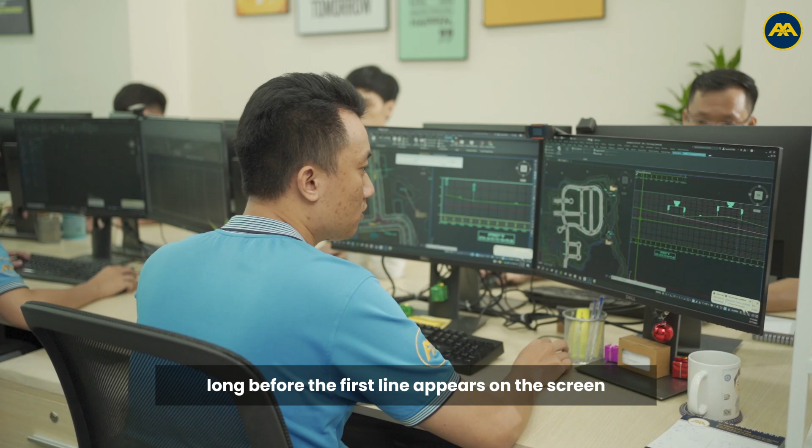A thoughtful design begins long before the first line appears on the screen. It starts with observation, with engineers studying the land, understanding its natural contours, soil conditions, drainage paths, and surrounding developments. Every site tells a story, and only through deliberate analysis can that story be translated into a design that fits harmoniously with its environment.

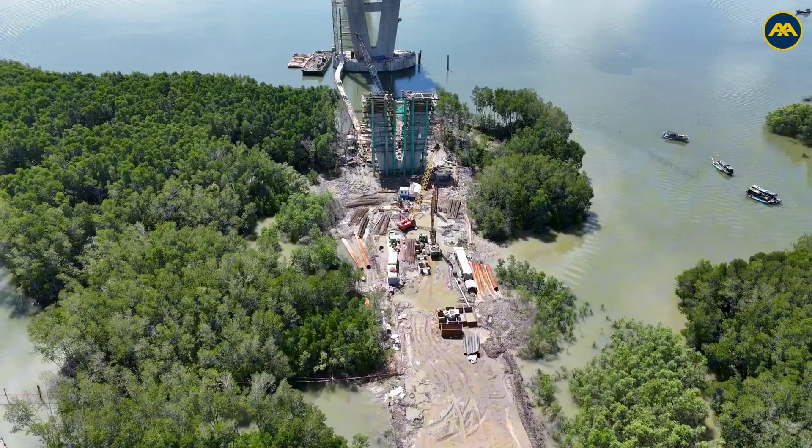When an engineer takes the time to explore how water will flow across the terrain, how grading will interact with existing elevations, or how small changes in slope can influence long-term maintenance, the outcome is more than a functional plan. It is a solution that stands the test of time.

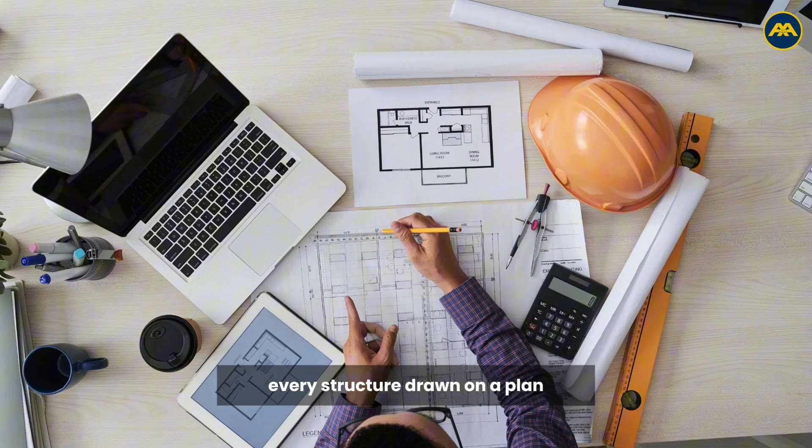Thoughtful design is, above all, a reflection of responsibility. Every alignment, every pipe, every structure drawn on a plan represents a decision that will shape how people live, move, and interact with their surroundings.

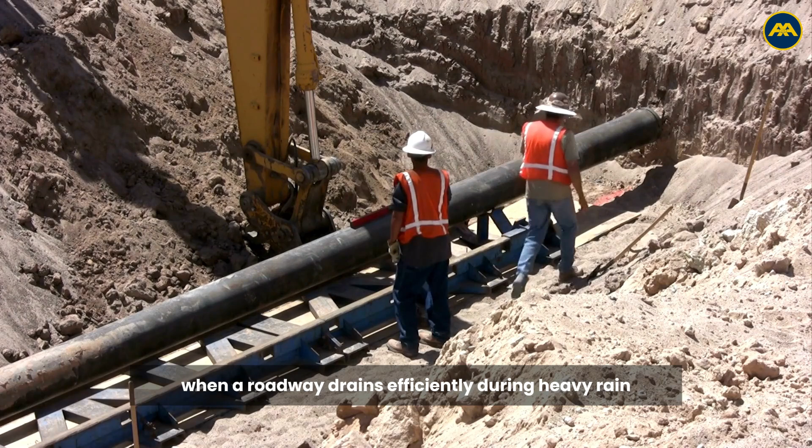When a roadway drains efficiently during heavy rain, or when a subdivision integrates naturally with its landscape, that success can be traced back to thoughtful planning and rigorous engineering judgment. The process requires not only technical accuracy, but also empathy, the ability to anticipate future users' needs and to design systems that are safe, resilient, and sustainable.

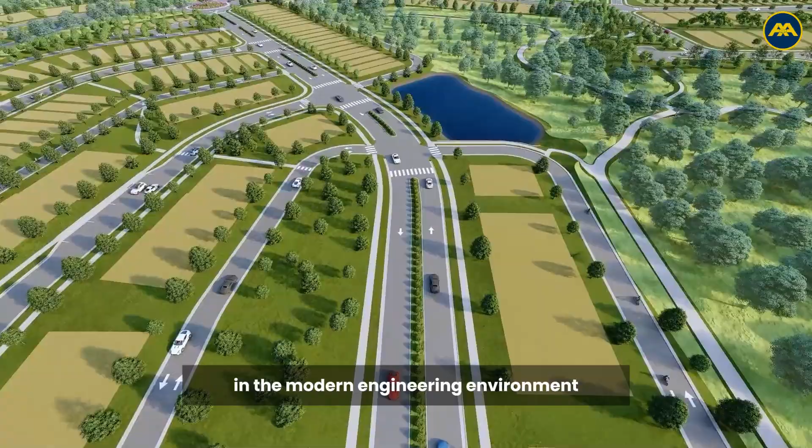In the modern engineering environment, where deadlines are tight and projects increasingly complex, maintaining this level of thoughtfulness requires strong systems and disciplined workflows. Consistent design standards, clear quality control procedures, and effective collaboration between design teams ensure that every drawing reflects both precision and intent.

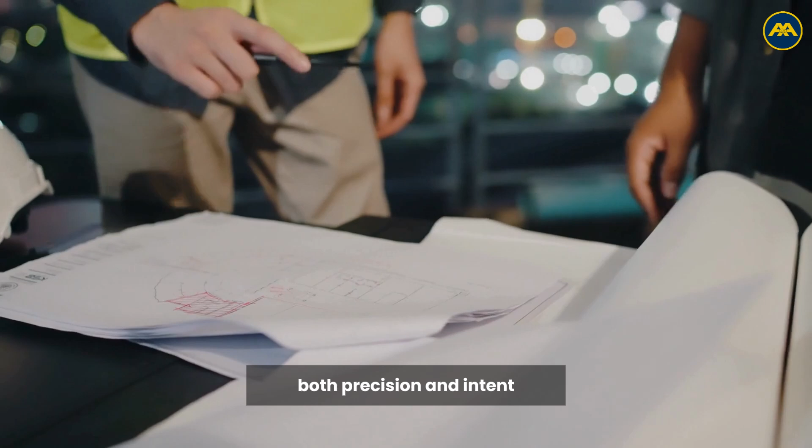These systems transform thoughtful design from an individual effort into a repeatable, scalable process that maintains quality even as project demands grow. Many civil engineering firms recognize that achieving this balance often depends on having the right technical support.

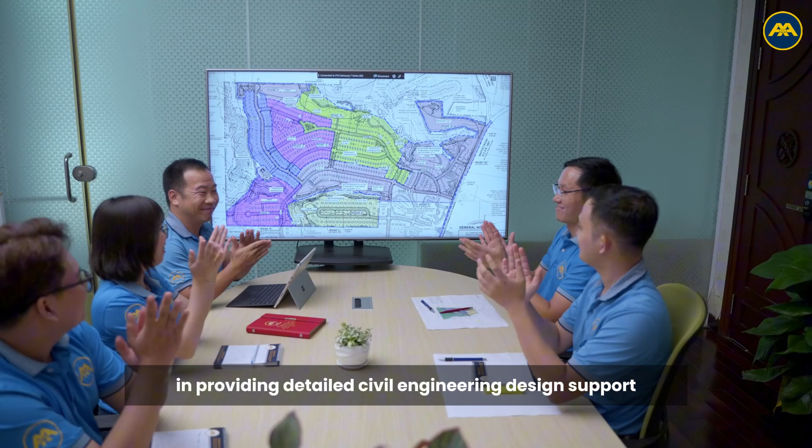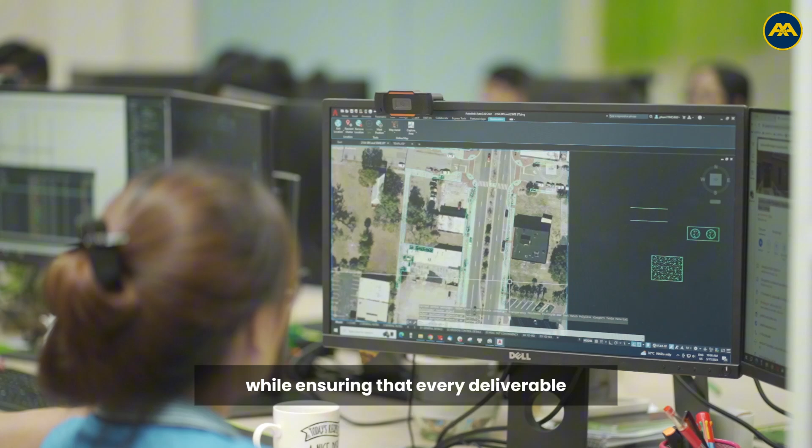Reliable outsourcing partners can play a crucial role in maintaining design consistency and efficiency. Among such partners, AXA Engineers has become known for its expertise in providing detailed civil engineering design support. Through well-structured workflows and a deep understanding of design logic, AXA Engineers assists firms in handling technical production with clarity and reliability. This allows design teams to devote more focus to creative problem-solving and strategic planning, while ensuring that every deliverable meets the highest standards of accuracy and constructability.

The approach practiced by AXA Engineers reflects the same values that define thoughtful civil engineering: precision, foresight, and accountability. Every project supported underlines the importance of integrating technical excellence with a clear design philosophy, one that prioritizes performance, sustainability, and long-term functionality over mere speed.

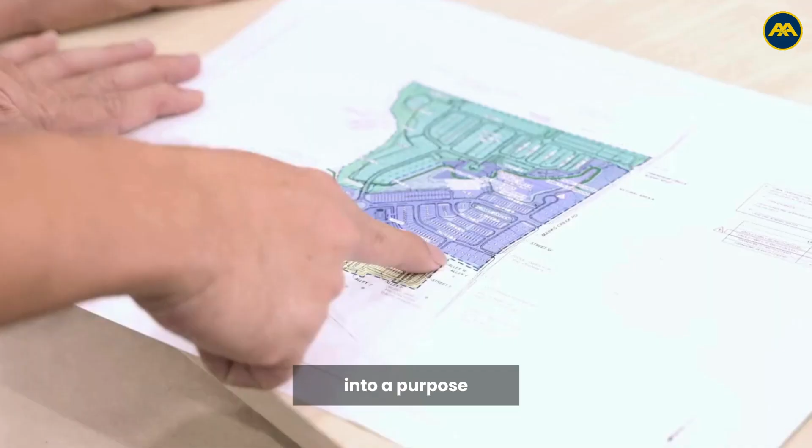Ultimately, thoughtful design is what turns engineering from a process into a purpose. It is what transforms a set of plans into something meaningful: infrastructure that works not only on paper, but in real life, for real people, over generations.

The true measure of a civil engineer's success is not how fast a design is finished, but how well it endures, adapts, and continues to serve. Because when design is approached with patience, precision, and purpose, it becomes more than engineering. It becomes legacy.